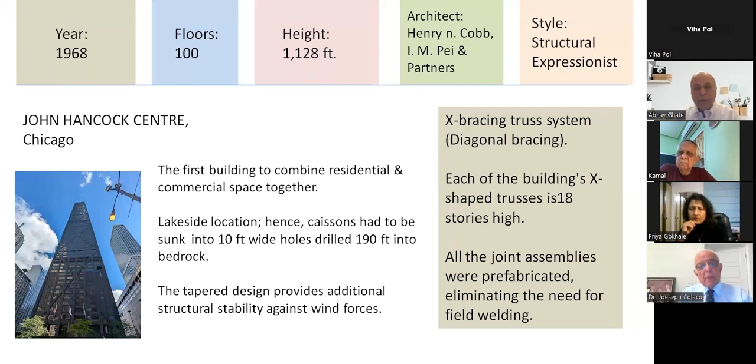On the John Hancock Center, my question would be, how did you handle the axial shortening of the edge columns and other things? The nice thing about a diagonally braced building is the axial shortening occurs as you go up the building, but the diagonals distribute the load. And one of the things I found in the computer analysis was that no matter what we did, the stresses on all the exterior columns were the same.

You can see from the vertical section through the building and the plan that the corner column theoretically has very little load on it. But when we ran the analysis, because of the diagonals, all the columns had the same stresses. So Dr. Khan said, okay, at any level, we're going to make all the columns the same size. And with axial stress being the same, axial shortening was about the same. So that's how it works.

One small question about it. You mentioned that the idea of putting one tower on top of the other came up at the last minute. How much progress was achieved before that? When this idea was introduced, were the foundations already laid? No, this was very, very early on. It was actually before I got there.

Bruce Graham and Faz were just noodling one day, and Bruce said, Faz, what would happen if we took one tower and put it on top of the other tower? This is a tapered building, but just imagine two rectangles, one on top of the other. The residential tower has a small footprint, and the office tower has a big footprint. So all the gravity loads come in at the transfer levels. And we had a 4-story truss system that was enormous in cost and weight, and the whole thing was a mess.

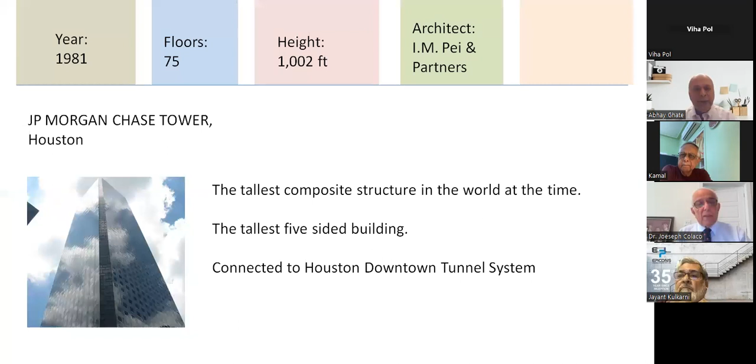And what you can see is what they did was take a square, which is 160 foot on each side. That's about 52, 53 meters. And we have columns at 3 meters on center all the way around on 4 sides. But the 5th side, which is the bottom left, is open. There's no columns, anything at all. And that's a very long span. That's about 80 feet clear.

So I.M. Pei himself came to me one day and he said, now, Joe, we got a ruptured tube. And we need to figure out how to heal the rupture, as he called it. So if we go back to the previous slide, I'll show you. Not this one, the other one. This one here. You can see the open side right there, which is 80 feet wide, with nothing. There's no frame, there's nothing.

So we started working on this. I went to the drawing boards and I said, okay, what would happen if I put diagonals across there? And just put like shoelaces. I call it shoelaces because we just put an X across there. And I showed it to Mr. Pei and he absolutely loved it. He thought that was the greatest way to solve this problem. And then he finally made a model showing the X's and all that.

And the next time we had a presentation to Mr. Hines, Mr. Hines just came off the chair and said, no, no, no. He hated diagonals. He said, no, they're going to ruin my leasing. I don't want diagonals.

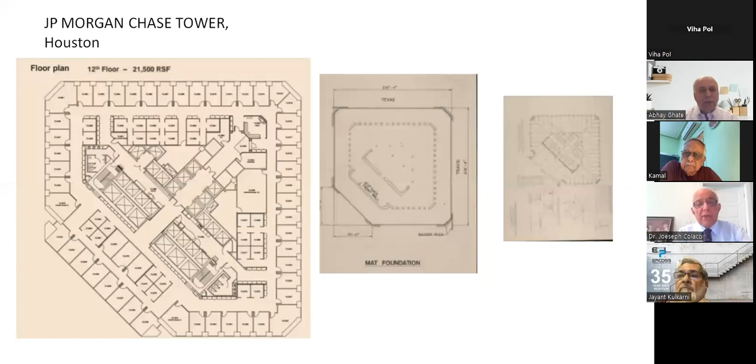And we came back later on and poured concrete around all the columns to make them composite. And this thing went up extremely fast. They built the entire building in 28 months, all 75 stories of it.

And these were the special problems we had to analyze: the foundation retention system, temperature analysis because the columns are half exposed, differential axial shortening, which we were talking about earlier, Abhay, because we got some steel columns, we got composite columns, we have shear walls. Every one of them has got differential settlements. And then at the 60th floor, we dropped the shear walls off, so the top 15 floors were exposed. So we have a moment transfer problem for steel to concrete at that section, and that's the 60th floor.

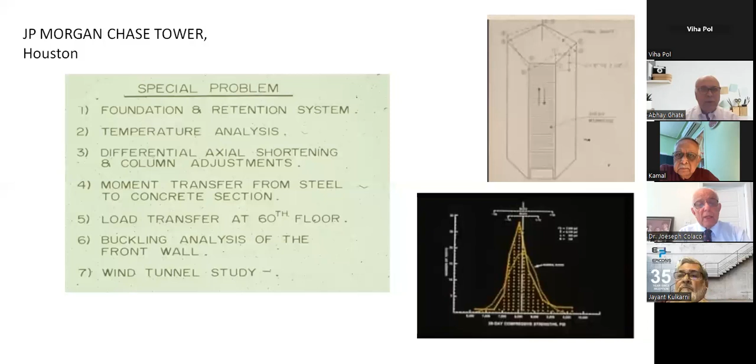The ground floor is 65 feet tall, about 20 meters. And so we have the problem of buckling of the shear walls. Now on the left, you can see the composite system going up. The steel columns go up first. And I suggested to the contractor to take the rebar with him. And he thought it was a great idea. So as he built the steel column, he put the rebar cages right with the steel column. They went right on up.

And in the bottom left, you can see the formwork system was very clever. They ganged 3 columns together with a form that could be moved like a sheet. And then there was a hinge, and you form the beam on one side and the column faces on the other side. And that thing was a godsend. It went so fast, it was unbelievable. They were building a floor every 3 days.

And this is a very high strength concrete. In those days it was 7,500 PSI, all normal weight concrete. And this for a long time was the tallest composite building in the world. It's been surpassed now. But you can see how logical the whole thing was. It just kept on going very, very quickly.

In the middle, you can see an intermediate place where the steel is up about 12 floors ahead of the concrete work. And then down below is the composite concrete that's wrapping all the steel columns, fireproofing them, and then wrapping the shear walls also going on up. So the whole thing went up very, very fast. We have a raft underneath this one also. The raft is 9 foot 6 inches thick and is down 63 feet, which is about 20 meters from the surface.

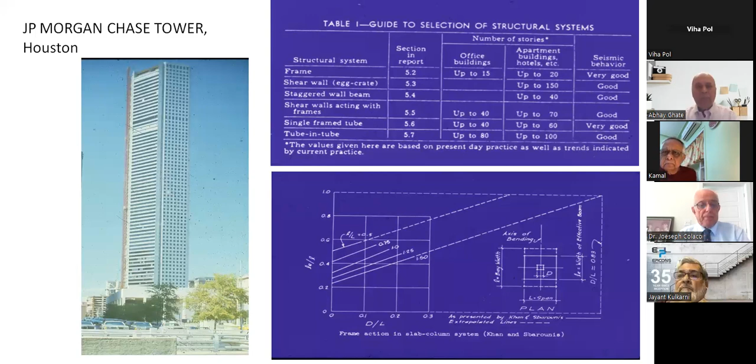Okay, now this is another building. The architect on this building was Philip Johnson. And this is a building that's 5 miles away from downtown Houston, on the west side, in what's called the Galleria area. And for many, many years it was the tallest suburban building in the world. 64 stories tall, 901 feet high.

It's a complete tube on the outside. There's no bracing in the core or anything of that kind. The entire wind load is taken by the perimeter tube. So the beams are 15 feet on center. So we have 3-inch metal deck, which is 75 millimeters deep. And the floor slabs are lightweight concrete.

And what we did with this structure, so the column is 15 feet on center on the perimeter tube, we used the same erection technique, what we call tree columns. I don't know where this first came in. I think the original World Trade Center had tree columns. I know that for sure. But they erected the tree columns.

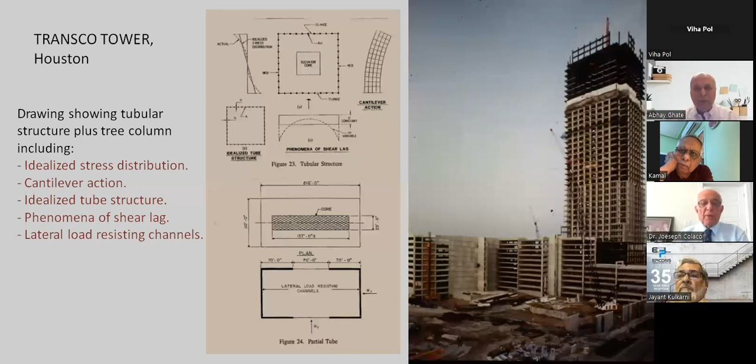And what was the approximate tonnage? Can you tell us something? The total, I'll give it to you in, it's 24.5 pounds per square foot. If somebody could convert that to kilograms. Yeah, 24.5. And then they got a beacon on the top.

I wanted to know why bracings were not provided in this building. Well, they were not required, because to me, if you can develop the perimeter of a structure as you go taller, it's much better than having a core. The cores become more and more inefficient as you go taller, because obviously you want to get the largest lever arm for wind resistance. Yeah, okay.

Yeah, there's the beacon going off at night. That beacon rotates, by the way, 1 time every minute. Wow. Beautiful. Very nice.

Okay, this is the Burj Khalifa. On this one, basically, we were hired to do the peer review of the building. The building was totally designed by Skidmore, Owings and Merrill in Chicago. And Emaar, who was the developer of the building, asked us to do the peer review of the building, which we did. And the fundamental thing about this building is it's an all-concrete building. And going from the ground all the way to the tip of the spire is 2,800 feet, which is still the tallest in the world at the moment.

And it's got a shear wall core, which is almost like a triangle. And then it's got columns on the perimeter at 30 feet on center, which is 9 meters on center, and a flat slab, all reinforced concrete flat slab, which is 9 inches thick. That's about 23 centimeters thick.

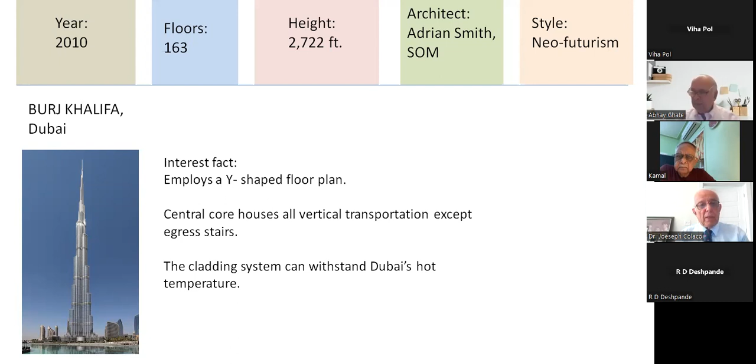And the construction was done by several companies joined together. The lead company was Samsung. And they built this building very, very fast. They were pumping the concrete all the way up. They pumped it almost 2,000 feet up.

Now, there you go. Now you can see the core, which is like a triangular core. And then the perimeter columns are on the outside. There's nothing in between. And as the building goes down, you can see the petals going further and further apart. So the fundamental structure is a shear wall with flat plate as a frame. And the whole thing, as I said, 2,700 feet tall.

Now, this is a pile foundation job. The piles are 60 meters deep. They go all the way down back into the limestone, which is very deep in Dubai. The shapes are all very, very good. And even the three-legged stool has been done before. There's a building in Chicago called Lake Point Tower, 70 stories tall, which we did the peer review of a long time ago. And this is just a vertical extension of that concept.

And there were 2 wind tunnel tests run on it, 2 foundations. Sheikh Mohammed of Dubai wanted this building to be absolutely fault-proof. And you can see on the right-hand side the pile foundation drawing for the building. And on top of that was a raft, which was almost 4 meters thick, raft on top of the piles. There's a big pile cap.

I'm not allowed to talk about it, but Sheikh Mohammed through Emaar asked me to do a very private analysis on bomb blasts for this building. 9/11 had happened in New York to take the World Trade Center down. And so he wanted an assurance that there was no possibility of this building being brought down by a bomb. And so we did the analysis of progressive collapse on this building.

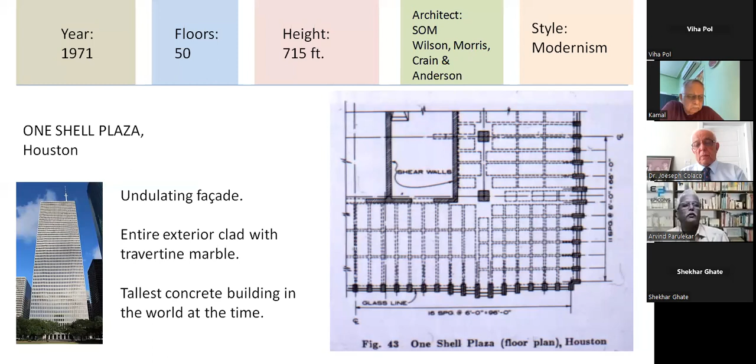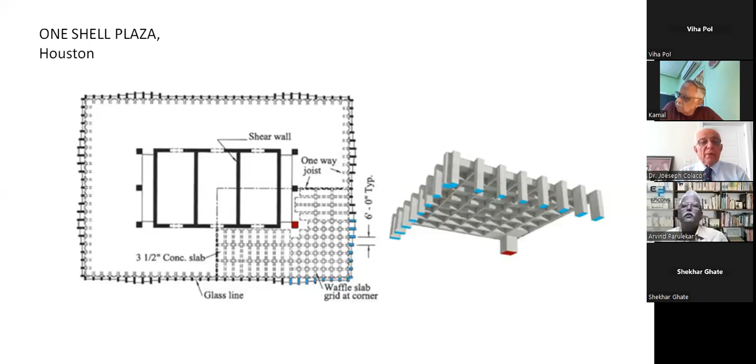Thank you. Joe, in Burj Khalifa you use outriggers, but you generally prefer more peripheral frames. What is your preference between outrigger and peripheral frames? I do not like outriggers. They're sort of a band-aid, as we call them. You try to make things work. To me, as you go taller and taller, you should totally develop perimeter systems and not even have a core. There's no reason to have a double system like this because the perimeter frames give you the most resistance of anything you can think of.

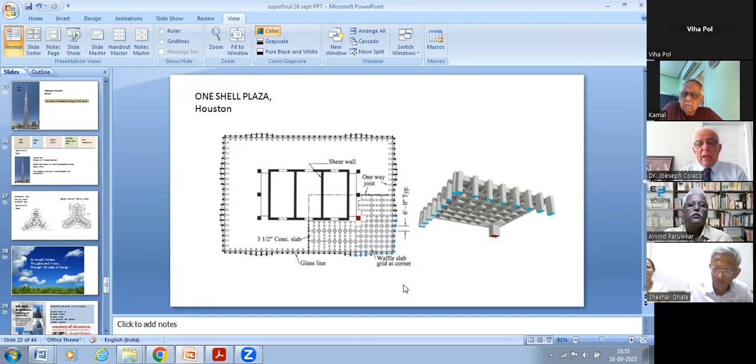So to that extent, the Burj Khalifa is not a very good structure because it relies on a core. And the core, as you can see, is so small, even though it's got the wings going off, you can see the wings that go up and down, but you don't generate the resistance from the entire perimeter of the building. So as you get taller, you should be going to a totally perimeter system, a complete perimeter tube. That's what you really need. Having a dual system with a core and another frame, that's not the ideal system to use.

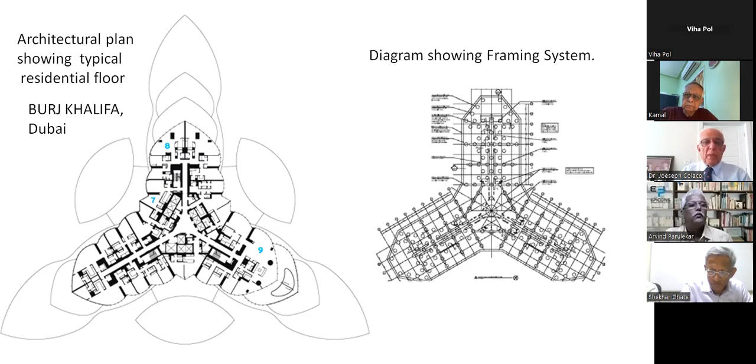The other thing I'll mention, Abhay, because we have some students over here, the one thing that disturbs me in the way buildings are built is I will hear from time to time, oh, here's the wind frame and these are gravity columns, these are only carrying gravity loads. So what it means to me is that some of the load in the building is not used to resist wind. On the Hancock building, for example, when you've got gravity and wind in one system, all the gravity load is resisting the wind load. Therefore, you've got very little stress on the columns from wind.

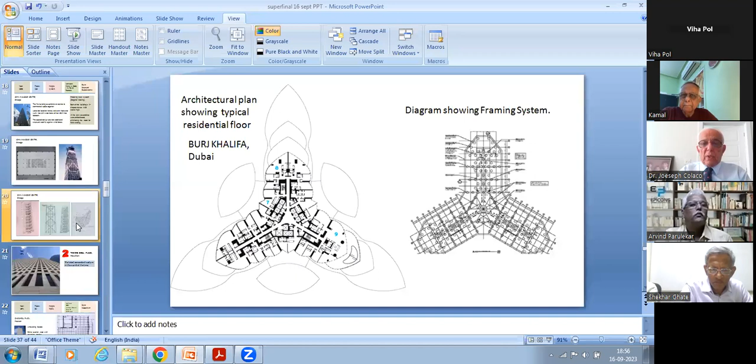Just to give you the stress levels: on the columns of the Hancock building they were less than 1/3 the gravity stress. And so there was not even an increase of size of the column because of that. And so you got a very, very efficient system. The whole building works essentially like a gravity system. And for the wind load, we only have these diagonals. That's why it's so economical to build it.

So in my practice, I try very hard not to have this dual concept. Here's a wind system, here's gravity columns. I try to have it just one. It doesn't work all the time, I'll tell you honestly, but you should try to do that.

So the problem actually in Indian codes, in zone 5, particularly in the highest zones like in Nepal, then perimeter frames, if you are to design for 25% of the seismic load, seismic shear, it becomes very onerous, you know. Right, yeah. Next question. May I just add one thing here?

Joe, this question is for you. We all agree with the strength and efficiency of the peripheral columns and the perimeter tube. Unfortunately, what happens is in India and especially in Mumbai, we talk to the clients about such systems and they say, no, we want to have maximum view. We want large windows. We don't want any column in between.

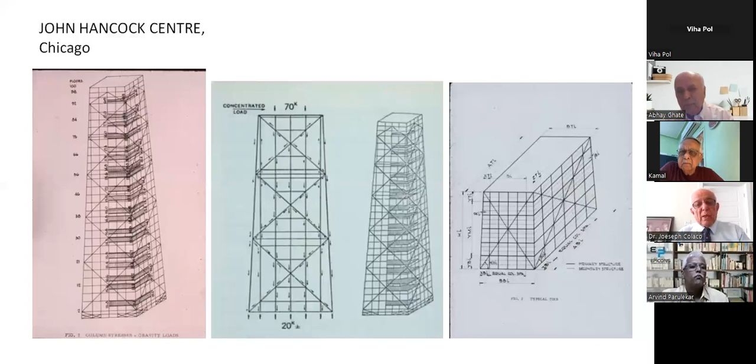But what they'll come back with is, but where the diagonals meet, in that location, it's a bad place for me. So you have to sit down with them and look at where the crosses are and say, okay, that occurs 5 times in the building. You look at this one, right in the middle where the crosses come together. That's the bad spot, I agree with that. And then the corner joint is also another bad spot. But they are very few and far between. The rest of the people have much more glass than anybody else. But I've not been able to sell that argument, Kamal, I'll tell you.

Yes, Joe, you remember we did one building successfully in Mumbai, Dadar, where you were doing the peer review for us. And we used diagonal bracings. I remember that one. Perimeter columns were only 500 by 500 millimeter square columns, 5 of them. And that gave people plenty of glass on all sides. But in spite of the structural success, I don't see other people buying that idea. Right. It is frustrating, you're right.

But if somebody were to analyze it clinically, what you're saying and what I'm saying is the exact truth. You get more glass in a diagonally braced building than you do in any other. Dr. Khan, one of the last buildings he did was called Onterie Center in Chicago. It's an apartment building, and he built pseudo diagonals on the outside. It was very cleverly done.

And it's what we call a partial tube concept. And I've used partial tubes in a lot of buildings, and people like them, but there are some people who say, hell no, I'm not going to use diagonals. So there's nothing you can do about it.

Yes. As an extension to this question, I would like to know whether you have done any diagonals within the building, in-plane trusses, leaving the perimeter columns free of diagonals. Is it possible? Yes, we've done 2 buildings like that. One is in Minnesota called the Norwest Tower. The problem with that is it then begins to interrupt the interior planning of the building. Correct. You get these diagonals going through the floors. Correct. And then the question becomes, which is worse?

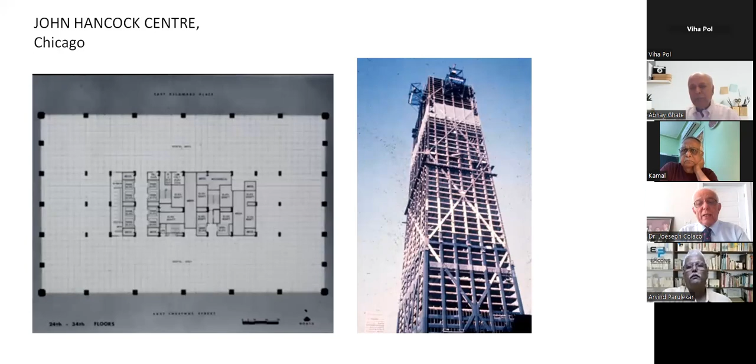And generally in American practice, they think diagonal inside the floors is worse. So, it's a matter of looking out or looking in, whichever way the client thinks is the best way to go. I prefer the perimeter diagonal like the Hancock building or like the Dadar building because it is clean, it's structurally efficient, and if you can convince the owner that you can actually get more glass than anything else, I think it'll sell. But there are some people who are absolutely opposed to diagonals. So, yes, allergic. They're allergic to it.

Yeah, I know. And actually, the problem, Kamal, is in Delhi, although in Zone 4, some developers ask us to design for Zone 5. For Zone 5, a dual system is a must. For having a dual system, we need columns. And when the columns become large, there's a conflict with the views. I know which one you're talking about, Abhay.

Yeah. Very interesting, Joe. It was very enlightening. I'm very happy. Absolutely brilliant. Some more questions you got? Very few questions. We'll take 1 or 2 only.

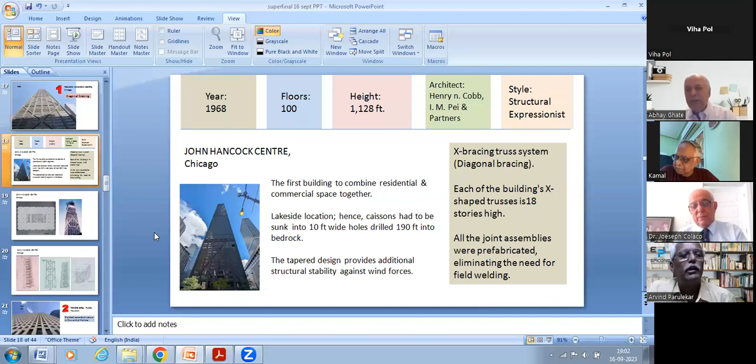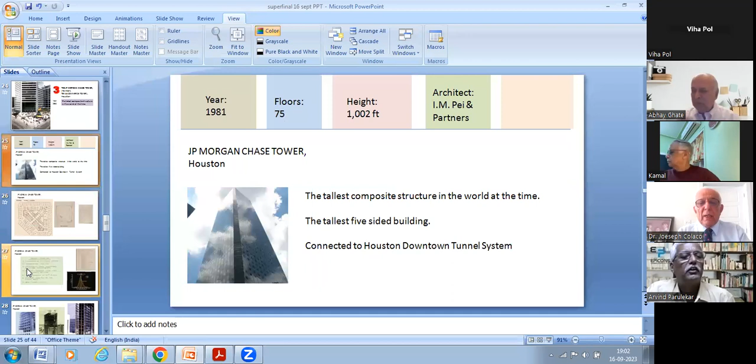Take 2 questions. How did you handle warping of core walls in JP Morgan? The warping? Yeah. Again, you just have to design for it. We have a certain amount of warping, and Dr. Banavalkar is very good at that. He uses a so-called Vlasov concept to figure out how much the warping was and then design for it.

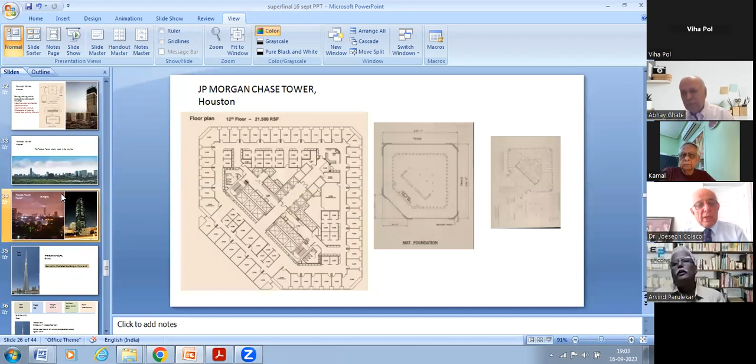Okay. And the last question I'll ask is, have you worked any time on TMD, tuned mass damper installation, and what is your experience on that? We have zero real world experience on it. Luckily for us, none of the buildings we did required a damper. They were all designed without dampers. I've always felt that the damper is sort of a solution of last resort. If you can't make the damn building work, you got to do something. But we tried very hard to make the building work and not to use these artificial things like dampers and all that.

Dampers are a mixed blessing. They solve a technical problem, but they have tremendous cost impacts. Typically with tuned mass dampers on the top floor of the building, the owner doesn't get to rent the top floor of the building. They have lots of maintenance problems. Some of these dampers have a lifespan, sometimes 25 years, sometimes 50 years. So there are a lot of issues with that. And so we have tried very hard to do buildings that do not require dampers. And so far, touch wood, we've succeeded.

That's great. Joe, I believe you are working on a 1 mile high building. Can you tell me? What happened was we had a recession here in the United States in the 1980s, and nobody had any work to do. I was asked to give a talk in Chicago to the ACI on how tall can you build a concrete building. So I just picked a number because engineers want numbers. So I took a mile-high building. I took the Sears Tower, which is a bundled tube, and I extended it up to 1 mile high.